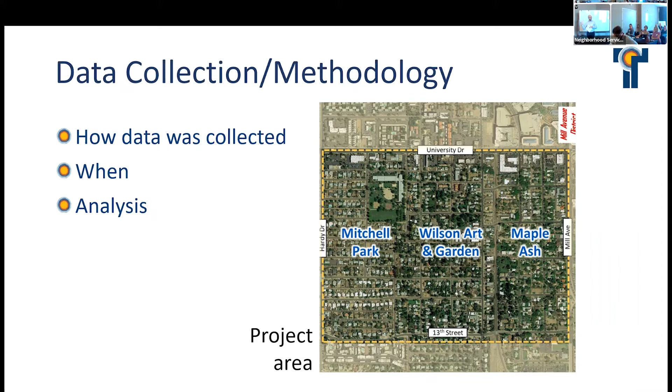Yes. Closer to the speaker, online they're having some issues. Okay. Is that better? I can speak better too.

Yes. And so for speeds, we collected, like I said, 48 hours. And what we're looking for is in those 48 hours, the number that we use is the speed at which 85% of the people are traveling in the 48 hours. So in a lot of these, there's outliers. You know, occasionally you get a 25-mile-an-hour street and you may get a 40, 50-mile-an-hour car. But in order for us to report that we have an issue, we have to get above that 85th percentile threshold.

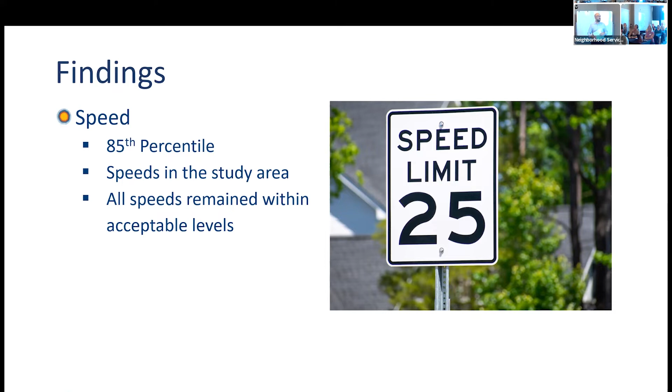Actually, we go a little higher, we go plus 6 miles an hour. So if the speed limit is 35, an acceptable level is up to 41 miles an hour. At 41 or above, we have a speed issue. Sure. Next slide.

Okay. So the overall findings in the volumes: the original traffic mitigation plan was successful in its original goal of reducing traffic in the study area. So as a whole, volumes went down.

We looked at, I don't have the numbers, but we looked at the main north-south routes. I believe it was Wilson, Roosevelt, Farmer, Ash, and Maple. And then we looked at how much traffic came in at University and how much traffic left at 13th Street. And that number was reduced, which was one of the original goals of the plan.

The next thing, it's on the next one. So for all the volumes, there was a redistribution of the volumes due to all the traffic mitigation measures. Traffic moved from one street to the next because of a certain measure, but still remained within an acceptable level for a neighborhood street. I believe most of them are at 500 or less, with some of them in double digits, even during the testing. Next slide.

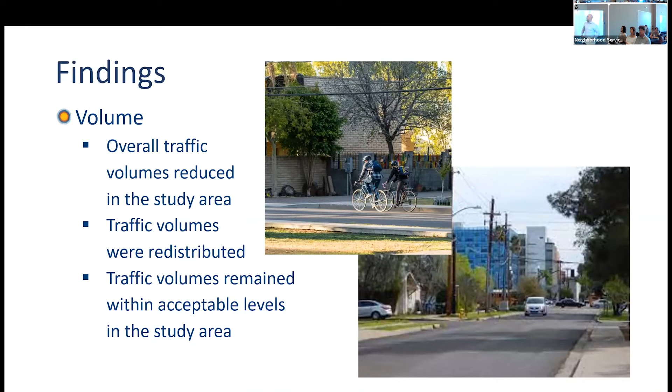So then by device, we looked at each device, again, with the pre-test volumes, and then during the testing. And the goal was to just say whether the device was successful to the original goals of the traffic mitigation plan. So I'll go device by device and how it affected the testing. As far as the 10th and Maple closure, the device was successful in reducing volumes and speed in the approach to the closure south of 11th Street.

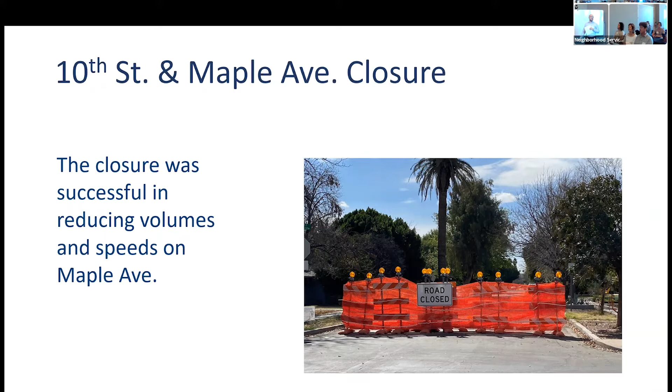It showed a little bit of residual traffic on Ash, but that was kind of hard to determine because Ash had a device on the north side and then also had the Farmer closure. So there's interaction between the different devices, which is not that different from neighborhood traffic, where people are going to pick the path of least resistance. But in itself, this device was successful in doing what the original plan goal was.

Next slide. So it reduced from a certain number to what number? Are you talking about vehicles per day? It reduced, I don't have the exact amount. It is on the back boards. I can show you after, but it did reduce volume and speed. The 9th and Ash diverter.

I'm having trouble with some of the vocabulary as well. What's an acceptable level of volume? For a neighborhood street? Yeah. So what we looked at, there isn't a clear guide, like some of our standards that say this is it. And so we look for these planning guides that give us an idea. For a neighborhood street, you want to be in the neighborhood of 500 vehicles. You could go up higher technically. When you start getting into the thousands, that's when you start getting into a different facility. So there's a gray area there. 500 per day? Yes, total in 24 hours, correct.

So, would it be surprising if putting barriers across the road didn't reduce traffic? I think we can take your word on that. Maybe we don't need to see the reason to reduce traffic. Well, you'd think so, but not necessarily. You could see an increase in speed as people are approaching the closure and turning around on other streets. You're absolutely right, it's obvious it's going to reduce the traffic approaching the closure, but you need to understand what it does to the adjacent streets, where traffic dumps on. So the 10th and Maple is probably not as clear because it's adjacent to Mill Avenue, whereas with some of the inner ones, you'll be able to see that there was more impact on the surrounding streets.

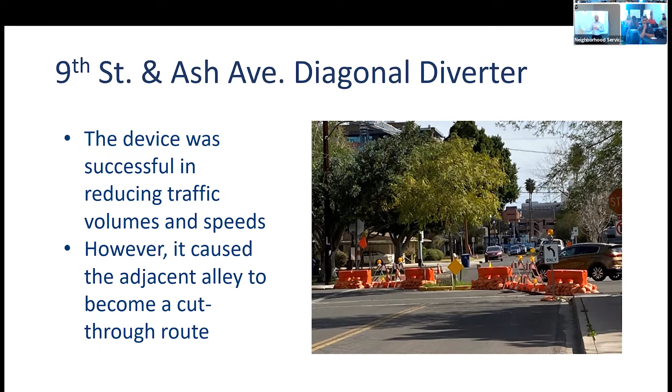Next one. The closure at 10th and Farmer, same thing. It's a closure. It's going to reduce traffic. This one, we were able to track from University down to 13th Street. North of the closure, you only got 2 blocks, so traffic's going to go down. South of the closure, you're still getting fed in by 10th Street, which is pretty heavy.

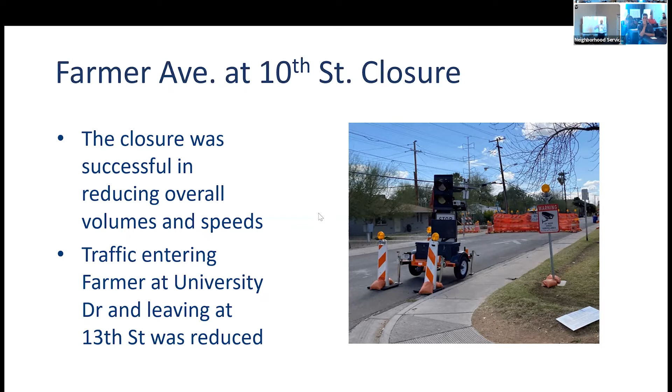The 11th and Wilson diagonal diverter had the same issue that the one at 9th and Ash did, in that it worked for the neighborhood streets for the volumes and the speed, but it created a cut-through route on the northeast corner alley. And so this diverter is not recommended for construction because it did not meet the original goals of the traffic.

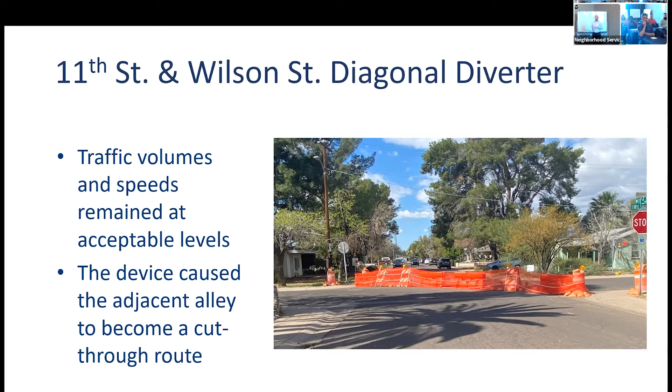Roosevelt and 9th, this closure, like the closure at Farmer, it reduced volumes, it reduced speeds. Obviously, north of the closure, traffic dropped off quite a bit, but south of the closure, we saw less traffic through 13th Street, although this one was also impacted by the star diverter to the center.

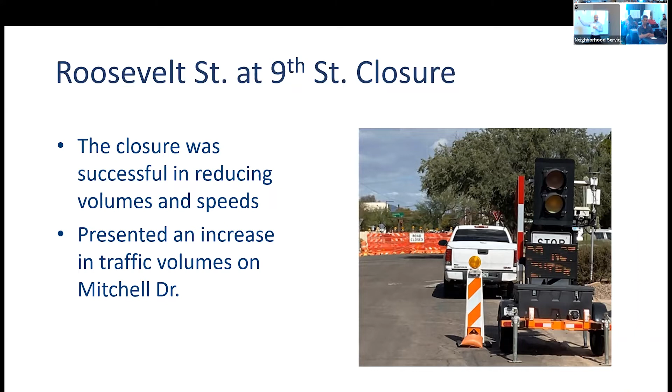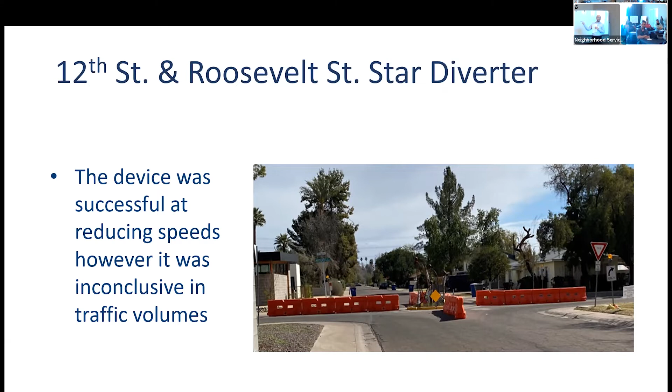So the star diverter, I think I already explained to some of you, it was inconclusive about what it did to traffic. One direction went up, one direction went down, and then a lot of people were confused about how to navigate the device. Also, this was the second device on Roosevelt, so we did not see this as adding something positive to diverting traffic. So we are not recommending this to move to construction.

The closure at Mitchell and 10th, it's a minor street, so obviously this one didn't have a lot of pushback. It's not really a cut street, but this one we are recommending. It was successful in volumes to the north, to reduce volumes and speeds to the north and the surrounding.

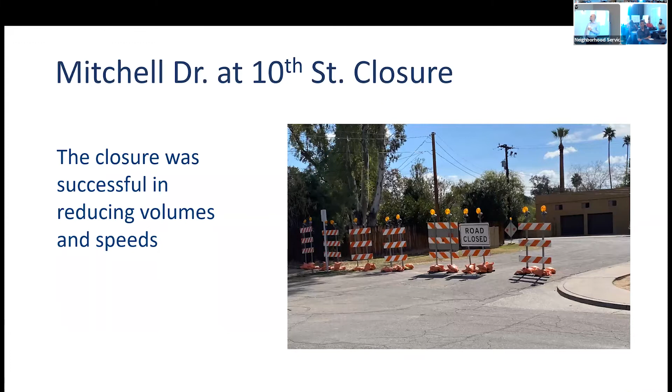Howe and Judd diagonal diverter, this one was successful in reducing volume and speed, even though it had to contend with the star diverter nearby. So this one is recommended under the hybrid plan.

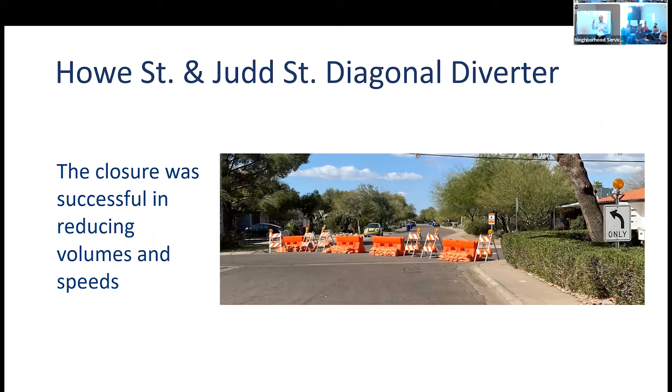The closure at McKinney and 9th Street, again, successful at reducing traffic going north to south from University to 13th. We saw some minor increases. I think it's layered. Could be 9th, I'm sorry. I don't remember the number, but one went up, one stayed about the same or came down, but generally there was no adverse effect to the surrounding streets with this closure.

Then I'll pass it on to Laura, and then I'll come back and talk about the alternatives. Unless anybody has a quick question. Yes, sir. So you said many of these devices were successful in reducing speeds. I recall you began by saying in the baseline period, the majority of cars were driving within an acceptable speed. Is that correct? Yes. Okay. Just to be clear. Yeah.

Who do we have here representing public safety at this meeting today? Is there going to be a representative we can ask questions to as far as law enforcement or fire? We don't have someone here today, Kathy, but they have been involved the whole way. Okay, are you gonna present data on that? On safety data? Data, we do not have that. Okay. We can get that to you. Yeah, well, I'll definitely need safety data regarding crashes, speeds, something that comes from law enforcement or from the fire department, and also maintaining response times in our neighborhood.

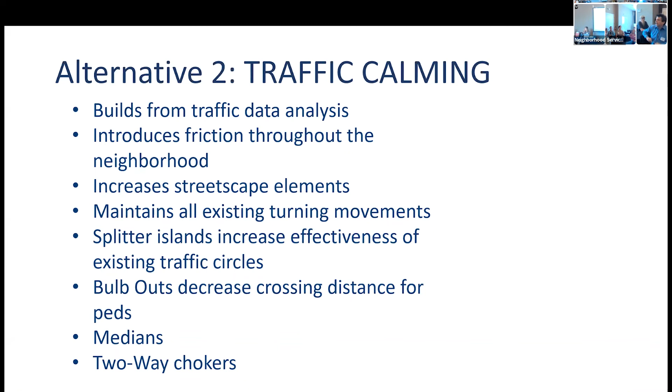Tempe loves the word vibrancy. They use that word all over. It's just a bunch of adjectives. Streets are a circulation system, and if I have a blockage in an artery, I might be walking a week from now, a month from now, but I'm going to die earlier. You folks are messing with some very serious stuff that is going to affect a lot of people in unintended ways, with good intentions.

I've seen it again and again with other cities and streets. There are unintended consequences here that are going to happen, and it's very sad. And that's why I'm extremely against this.

We'll take this last one, then we're gonna go on to the next slide. Yeah. Two introduces a concept of a splitter island. Yes. Modify existing traffic circles. Do you have an example? We do, and we have some pictures in the report that you can look at online of all of these, so the chokers, all of them. Is there a splitter island in the existing traffic calming already? Currently, right now, no, there is not one in there. So you have to read the report and see what it looks like. We can draw one for you. Come up after the meeting. Okay. Yeah, we can address that.

If you want to take the next slide? So there was one more slide about the third alternative. Did you want to say something else? I saw that there's three. You already said that? Yeah, I already said the no build, leaving what's out there. So just real quickly, I want to say a few things about the voting. This one's a little bit different because there's actually three alternatives, 1, 2, and the third one that you just described.